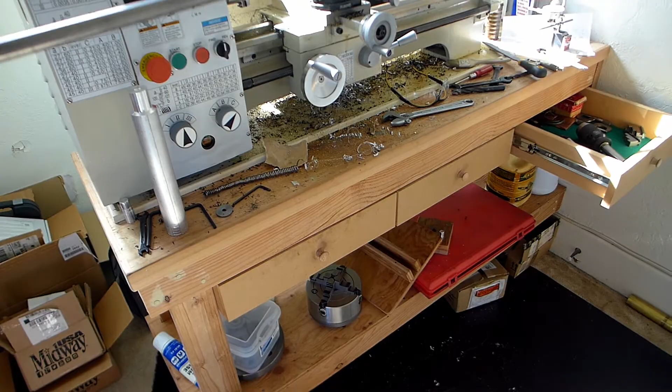This is a piece of 1/2 inch 4130, and I want to stick it in my lathe here and just drill a hole that's just under 3/16, then part it off at just a little over 1/2 inch, and then I'll flip it around and face it. That's going to be a bushing in the brake pedals. I'll make 2 of them.

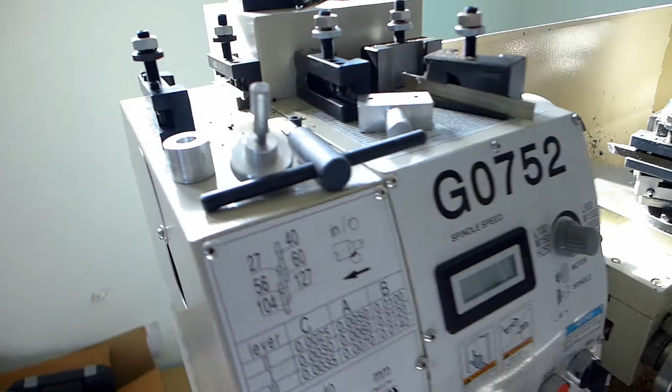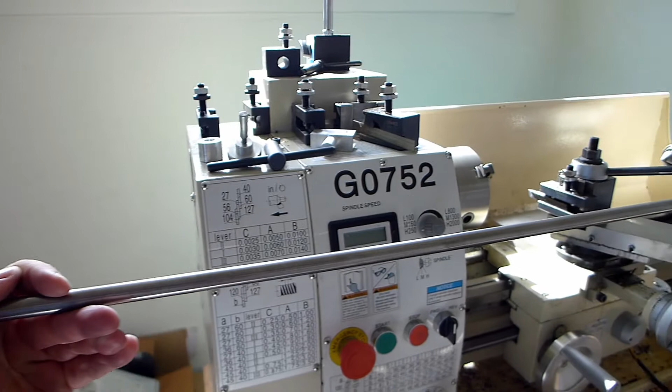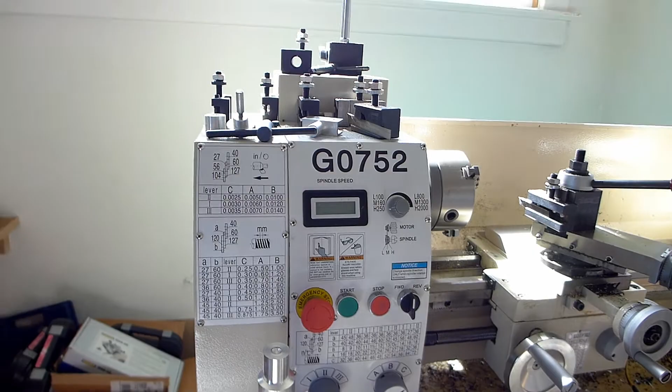Once it's welded up, then I'll ream it to 3/16. And I made this little aluminum piece here just to put in the rear of the spindle to give this long rod some support, so hopefully it won't flop around when I turn it. Hopefully I can turn it at a somewhat high speed and avoid flip-flopping. Along with it being 1/2 inch, it's somewhat stiff, so we'll see how that works.

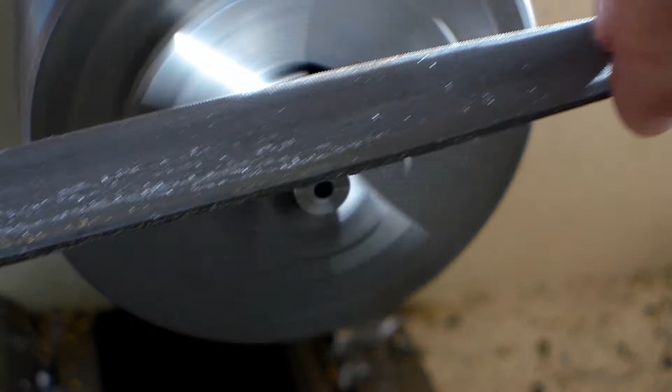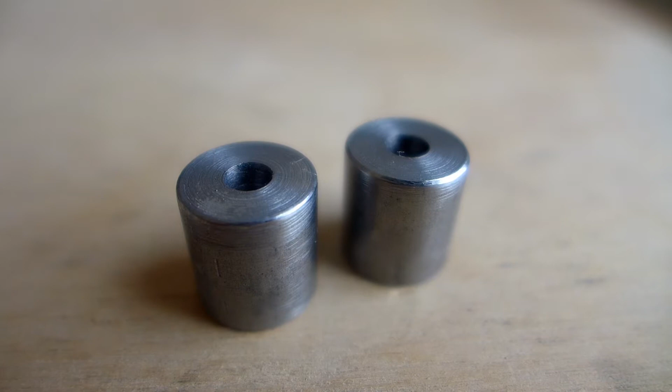So these I will weld up as part of the brake pedals, and any deformation that occurs during welding will be eliminated through reaming, and these will get reamed to 3/16 of an inch. So I'll ream them after they're all welded up.

And the brake, actually these actuate a lever that squeezes the master cylinders.

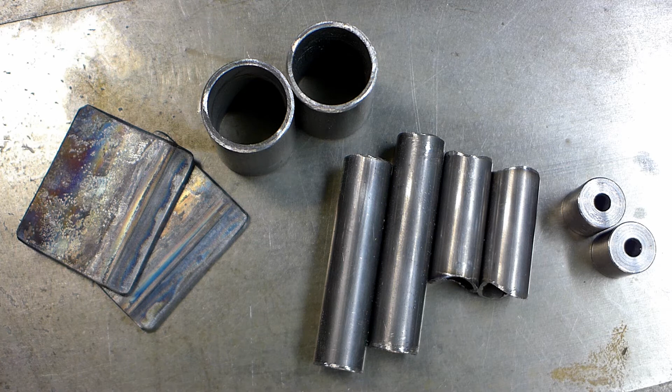I'm about ready to weld up the brake pedals. I ground curves on the ends of these. It's actually kind of tricky, kind of fiddly. One radius for this, a tighter radius for these little guys.

So I'll start out by welding these 3 pieces together. I'll do both of them. Then I'll grind a small radius on this also to fit these. After I've done that, I'll probably use that whole assembly as a handle to grind a steep angle on this, and the pedals will get welded on there.

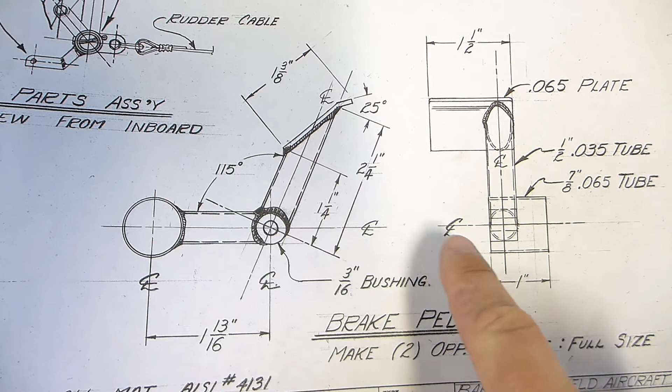Let me show you the blueprint so you can see what I'm going to do here, or attempt to do. Alright, so these are the big tubes, but they're only 1 inch wide. Then there's the small tube, and I ground the end on those already.

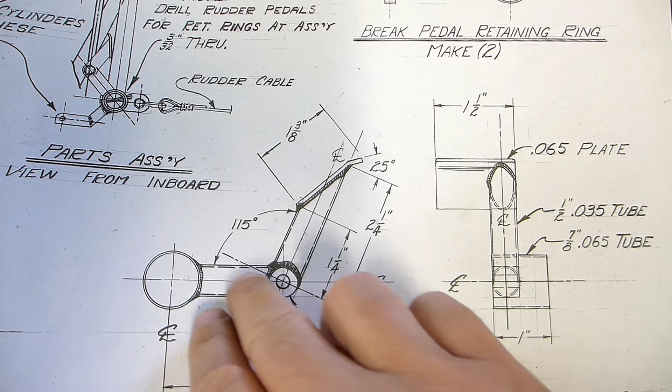These are the little guys I made on my lathe, and I'll ream those out after this is all welded up. I'll start out by welding those 3, then I'll grind the end of this, weld that on there. Then I'll use this whole thing as a handle, grind this angle on here, and finish up by welding the, I don't know what that would be called, just the footrest.

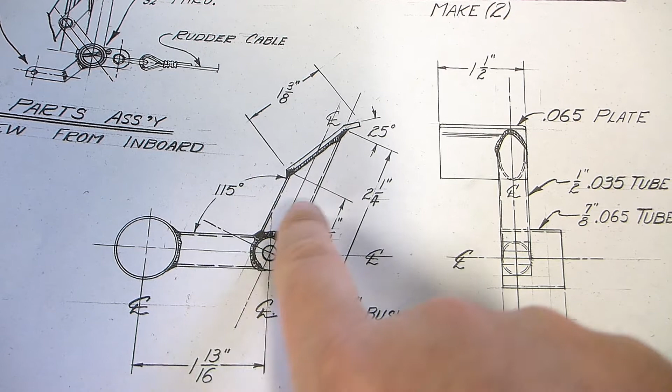That's the goal. The trick here is that this is a big piece of steel and these are small tubes. The trick is going to be welding these up without just burning these tubes away. So that ought to be fun.

That little tube, I can see if I move the flame away, I can see what's getting red. And that little tube is heating up super fast. I'm trying to keep the flame focused on that big piece of metal so I don't just melt the little tube into oblivion.

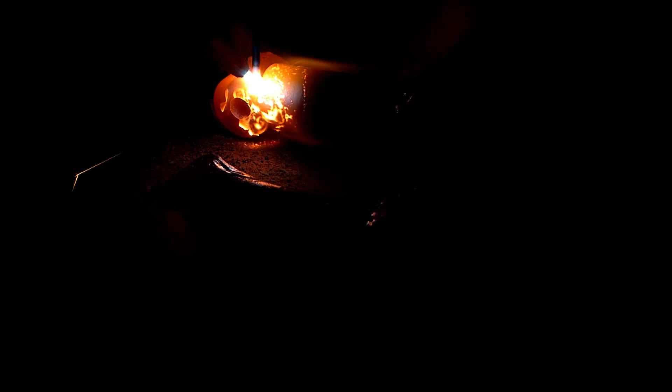I'm trying to point the torch more towards myself, away from the tube, more this way, so more of the heat hits this heavy piece and less of it is focused on that. You probably couldn't see, but I'm trying to point it more towards this heavy piece and less towards the small tube, in the hopes that I don't burn through the little tube.

So I thought welding these little tubes to these tubes would be much easier than to these buttons or these little blocks of steel here, but really it's not much easier. Maybe that's just because of my attitude, and because I thought it would be much easier, but it really didn't turn out to be too different.

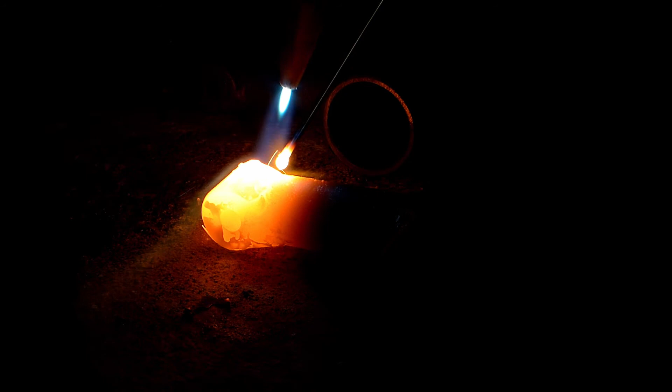That is getting hot. It's roasting my hand. I'm going to grip down on the torch a little bit. Holy cow, that is hot. I should probably put gloves on. I have gloves, but for most things, or the things I've done so far, you don't need it, but that just radiates so much heat.

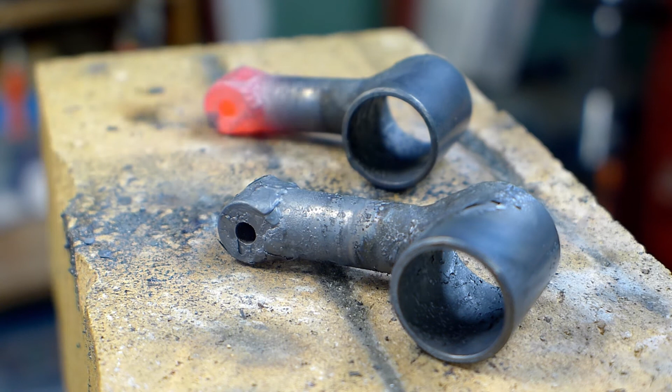Need to weld another small tube on the other side of these, so I'm not done yet. Looks like my camera didn't melt, so that's good. Huh. You know, that's not terrible. I don't think I destroyed them anyway.

It's not too bad. A lot of junk on the outside, but that was difficult, but kind of feel good about it. I guess I feel good mainly about not destroying it totally. That was difficult. That small tube just wanted to melt into a puddle.

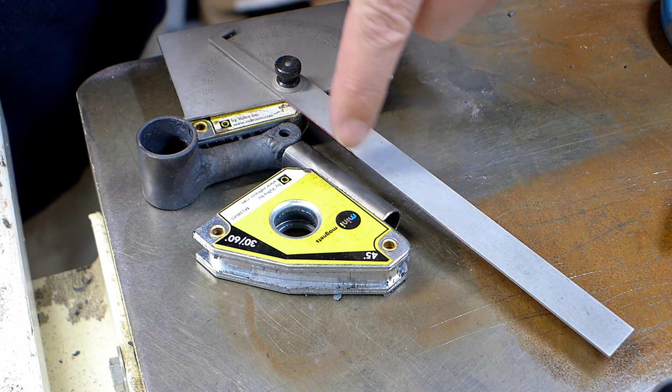So now I'm going to weld the second piece on here, and I ground the little radius on the end there. And these pieces are small and funny shaped, so it's hard to hold them. So I got some magnets up there, which don't really stick to the table when you've got them sideways, but they add enough weight that hopefully it'll keep them in place.

And this angle is 115 degrees from here to there. So I'll just tack up one of these sides, and then I can get rid of the magnets. And the trick, I think, to this is going to be that I need to make sure I do the other one opposite. Doing this first part, they're identical, nothing to think about. But from here on out, well, pretty much just this, putting this tube on, I need to keep that in mind. When I do the second one, I need to think carefully and make sure I get them on right, so I don't have two that are the same, because they are mirror images.

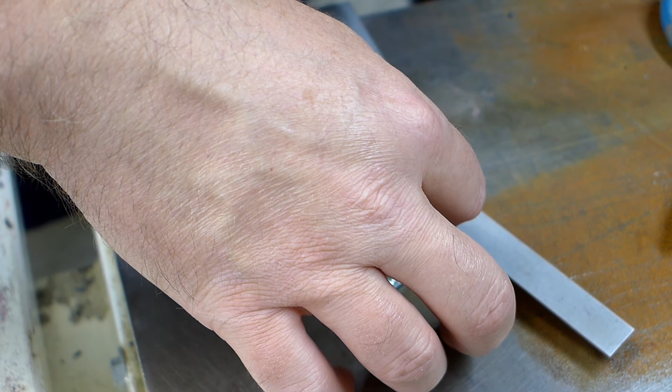So let's see, that angle's good. I think my alignment's good. I have a little thin piece of aluminum under here just to get the height, get this up just a hair for alignment. All right, I think that's good.

After I tack this, I'm going to let it cool off, and then I may need to straighten it. There we go, that should be a good tack.

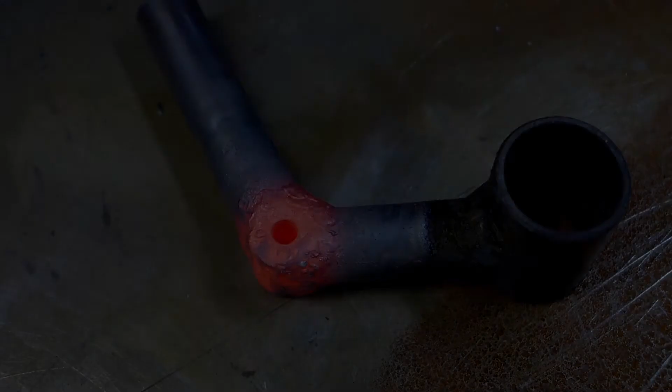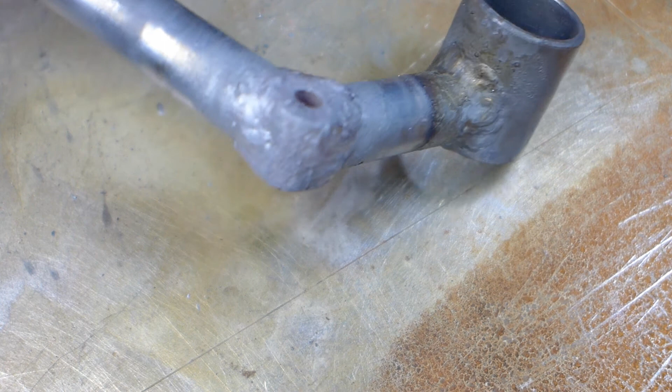They've got a massive weld on the inside of that. Probably pretty ugly by professional standards, but it'll be strong, I guess. I probably could go in there and do a little bit of cleanup. Blend it a little more. Do a little blending in here, over here, around here. So ultimately, I don't know if these are going to be good enough.

The alignment, the parallel, these are not perfectly parallel. I don't know if this should be wider and this should stick out further past the welds to give a bearing surface. And actually the plans aren't super clear on that. This seems like what the plans say, but I don't know. Anyway, if nothing else, this is great practice, and maybe these will work out just fine. So I'm going to go ahead and weld the toe plates on there, or the foot pads, or whatever you'd call them, and they'll be done. The brake pedals will be done.

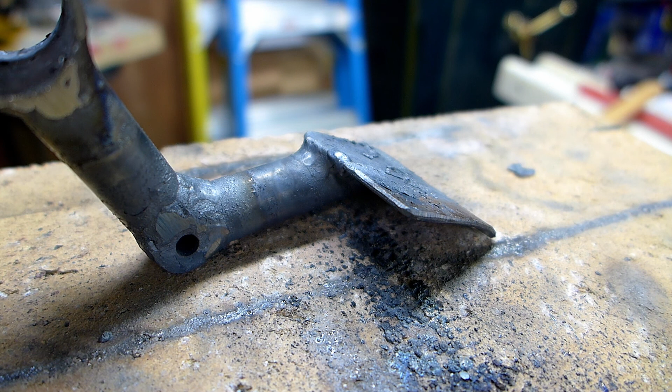Well, that was difficult. Probably could go back in with the torch and clean that up a little bit, just a little bit. Of course, then you risk melting it away again.

Brake pedals done. Just real quickly, this is more of a perspective that you'll get in the airplane, except this will be more like that. Your heel will be down on this bar across here. So this would be the right rudder pedal, and this will slide on here. I think it'll come all the way across like this and ride on there. So your foot will be on here, and you'll just push with the whole foot to do the rudder, and then just push with the toe on the brake.